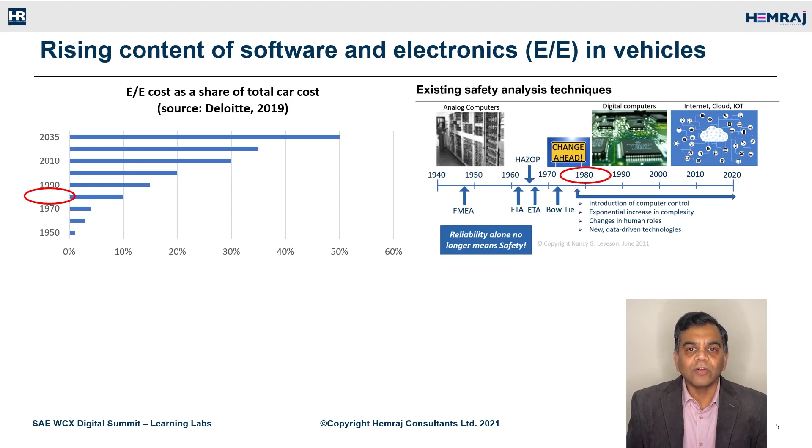Software and electronic malfunction is creating havoc. It results in loss of reputation of companies, penalties and fines, and billions of dollars lost in warranty claims, depleting profits. Let's look at the statistics in 2019. Over 1.3 million people are dying in road accidents. 15 million vehicles were recalled, and more than 3 vehicles were recalled for every new one manufactured. We have to identify ways of minimizing hazards before the first vehicle drive.

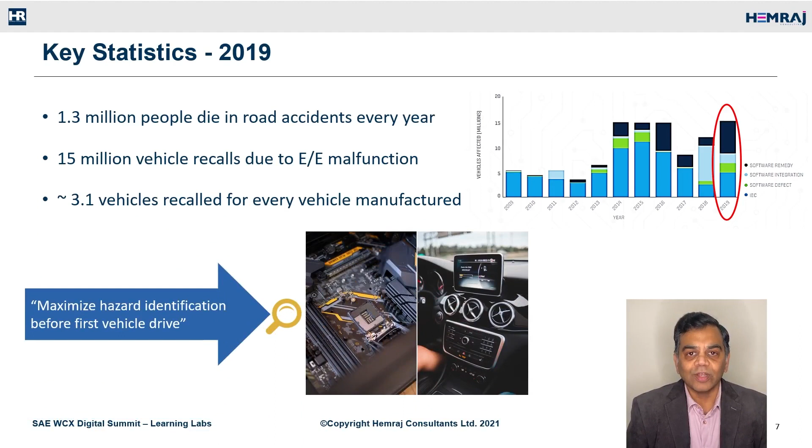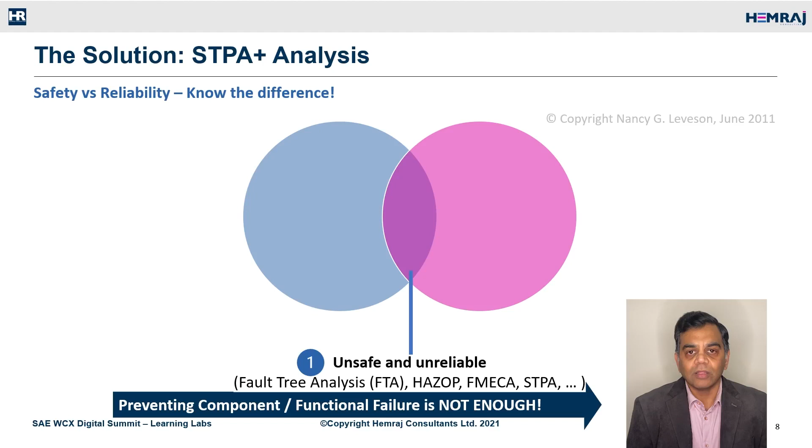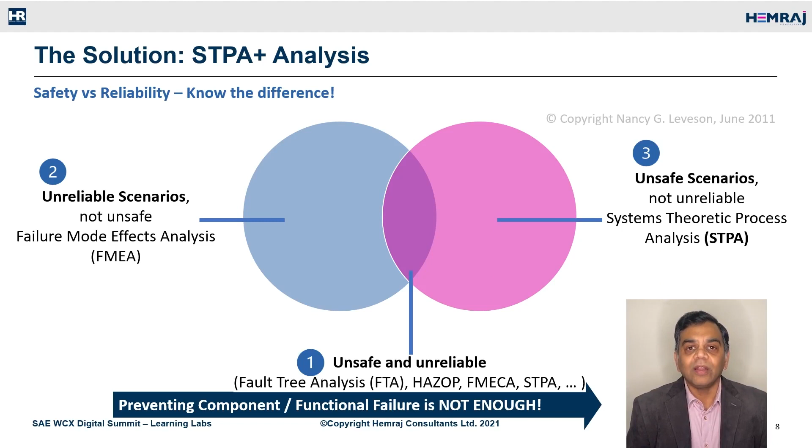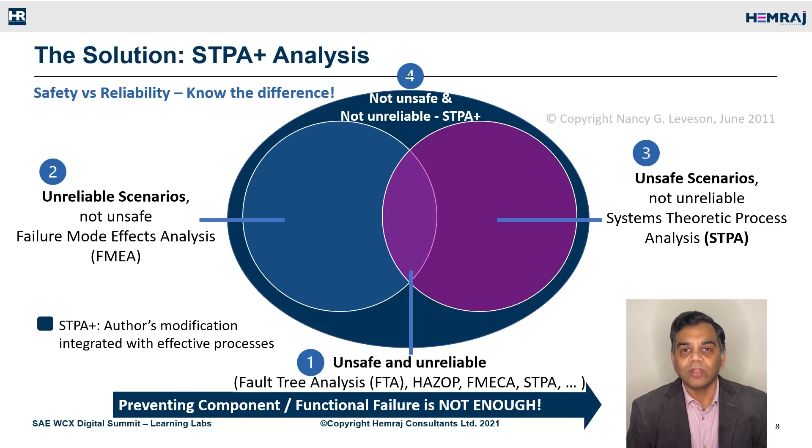First and foremost, it helps you in maximizing the number of hazards identified upfront. It also provides early feedback to other work products from a fresh eyes perspective. It also refines the input work products used in performing this analysis. Last but not least, it concurrently supports the analysis of safety of the intended functionality as well as cybersecurity along with safety. And don't forget, you could perform this analysis in days or weeks, which potentially could have taken weeks or months by other existing techniques.

So this is STPA as defined by Nancy Leveson and Professor John Thomas of MIT. The 4 steps comprise identifying the system boundary and defining the purpose of analysis. Second step is defining the control structure, which comprises a controller and a controlled element. In step 3, you identify the unintended control actions, and in step 4, you identify the scenarios when unintended control actions could occur.

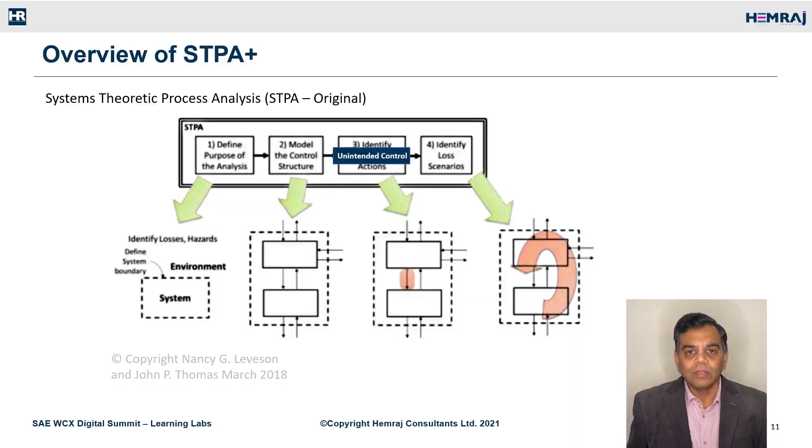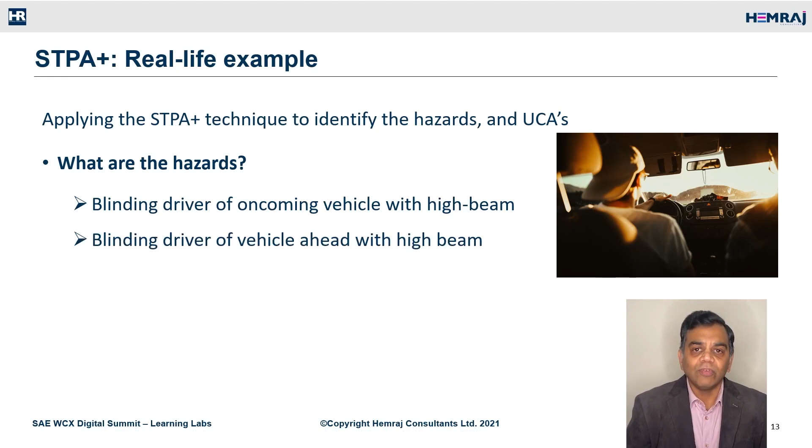If the headlamp's high beam is not switched on, the driver of the ego vehicle will not have good visibility of the road ahead. In step 2, we define a control structure, starting with the driver, the vehicle, and the road and environment in which the vehicle is driving. We then build in the building blocks of the system aligned with the system architecture.

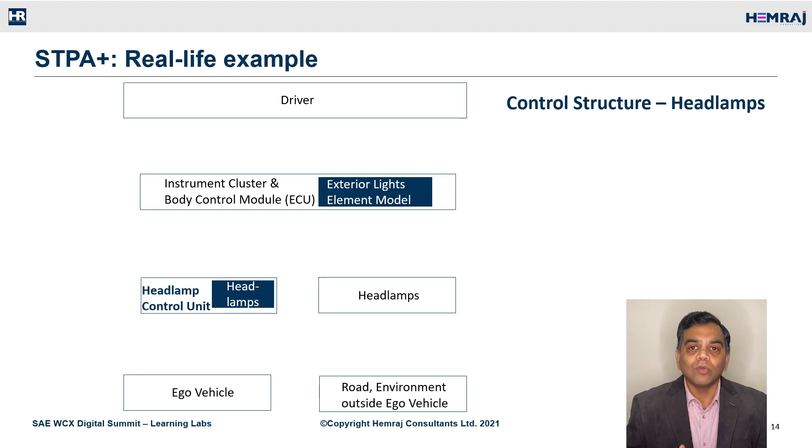Notice the abstraction of the instrument cluster and body control module, which have 2 different control units, into a single electronic control unit. The right level of abstraction is important to optimize the identification of control structures. We then start with the arrows going from top to bottom, which are in blue, which are the control actions. So the driver can control the vehicle by applying the brake or steering the vehicle or accelerating it.

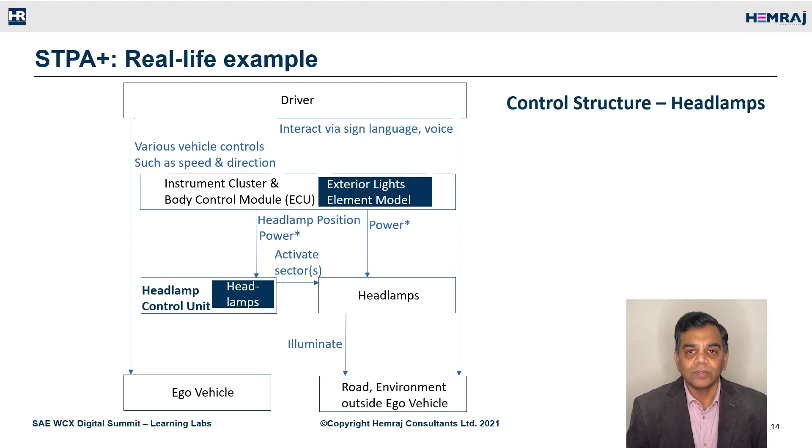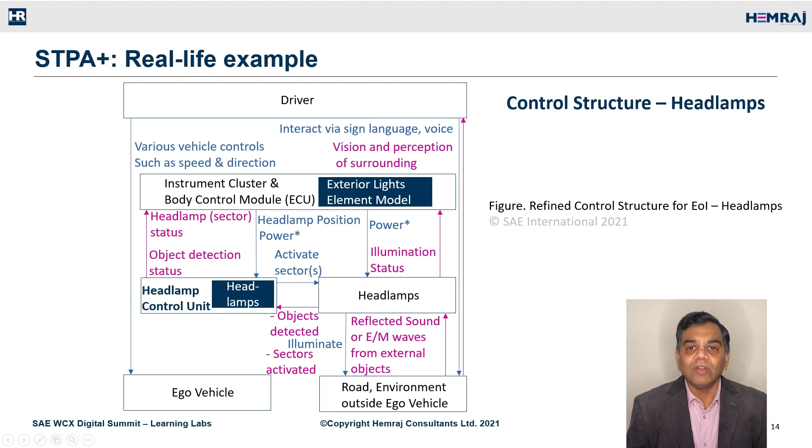Similarly, the power supply is provided by the instrument cluster to the headlamp control unit and the headlamps via the ignition switch. The pink arrows show the feedback provided by the lower level control elements to the controllers. So the headlamp unit is communicating the objects detected to the headlamp control unit and also informing the instrument cluster. These translate to the responsibilities of the controllers, and the feedback is used by the controller to align with the element model that characterizes the behavior of the controlled elements.

In step 4 of the analysis, we identify the loss scenarios. These again align with the hazards and the unintended control actions identified earlier. For example, the oncoming vehicle may not be detected. Further, there could be a delay in the communication between ECU and HCU, which would result in the headlamp control unit switching on the high beam for a longer time than required.

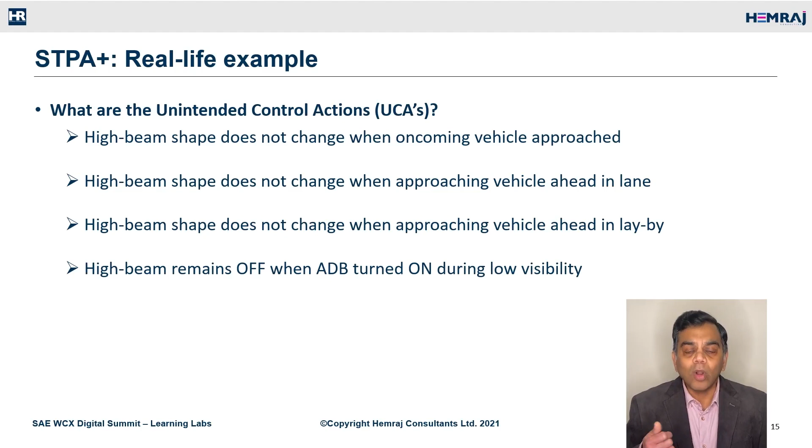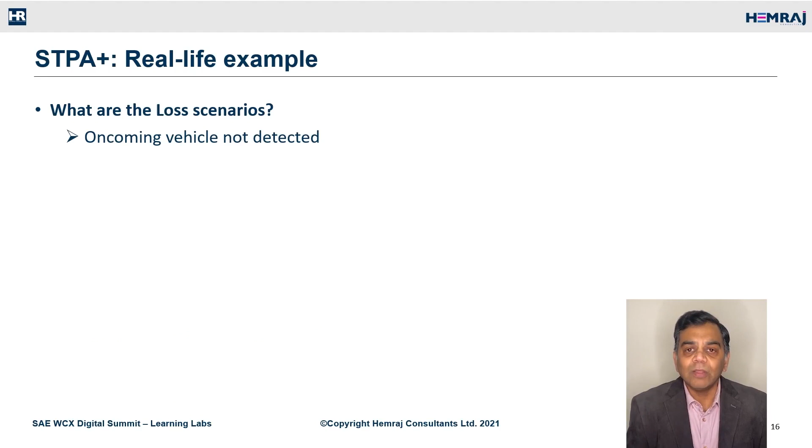And lastly, it is quite easy to understand that if the headlamp high beam is faulty, it will not switch on. But what this analysis technique helps you to understand is that it is quite possible that the headlamp control unit assumes that the high beam is already switched on along with the low beam, but because of the configuration of the different sectors and the commands, none of the sectors actually get switched on.

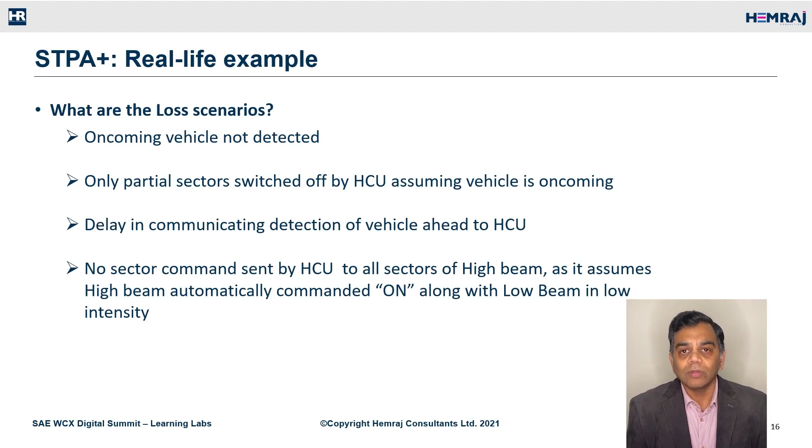Now let us take a bit deeper look into preventive quality assurance. Let us talk about the new concept of FMEA analysis, especially for ECU hardware. Why a new way? What was the background? FMEA itself is in the meantime 70 years old. At the beginning, it was created to analyze mechanical systems, following the philosophy that reliable components make a reliable system. This mechanical point of view was transferred into the electronic world of hardware and software. And it is not really matching with expectations, I'm afraid.

As you can imagine, the Sigma FMEA is a combination of classic FMEA and Six Sigma methodology. It supports analysis of all ECU life phases totally. It starts with the dream of a system, requirements analysis, and ends with recycling. The first aspect of analysis is design for functionality, meaning voice of customer. Electronics have to fulfill the expected functionality first. After that, the design for manufacturing aspects, voice of business, are to be validated.

Sigma FMEA analysis process will be done under two aspects. Aspect 1 is the ECU design for functionality analysis, with the goal to find out if the electronics are able to fulfill customers' requirements. Interfaces between modules, their functionality and other characteristics are to be validated. This is to be done independently of maturity level.

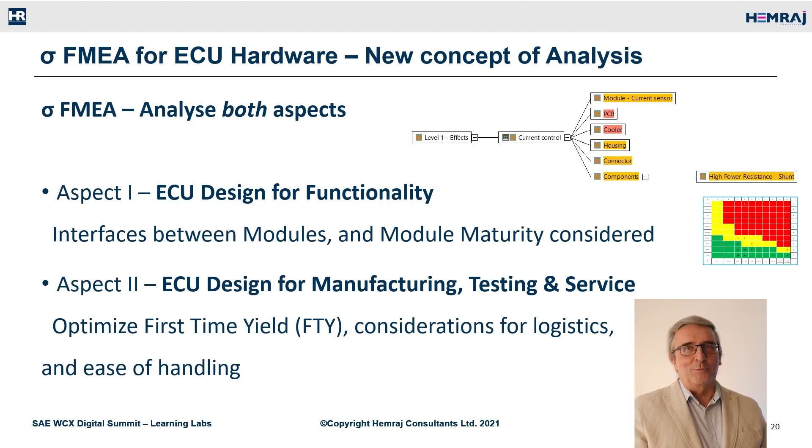Sigma FMEA is a result of many years of experience as an FMEA moderator for the automotive industry. My customers, mostly German automotive OEMs and their suppliers, started to use it in 2017. The results were a reduction of development time of up to 20% and reaching FTY values of 99% and better after a very short period. Our next subject is FIT calculation.

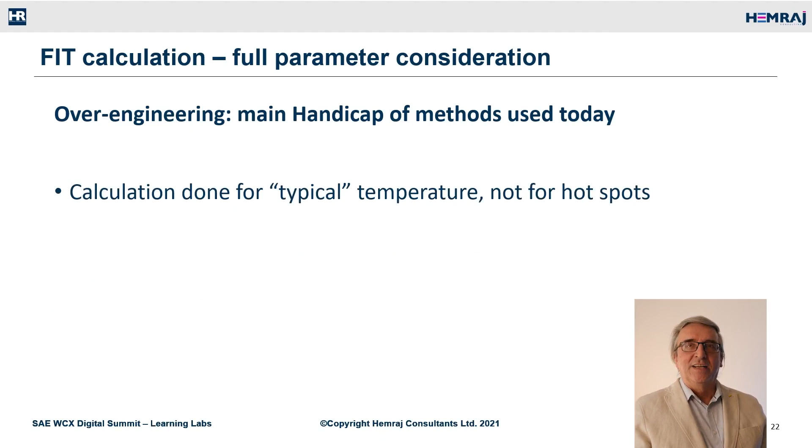A very important point for all of today's hardware developers. With one handicap, I'm afraid. The consequence of this handicap is over-engineering of the electronics. Why? Because the calculation is done mostly for one hypothetical temperature, mostly higher than the real one. The status of the electronics is not really considered, and the lambda values used come from standard documents. Current values from component manufacturers are not considered.

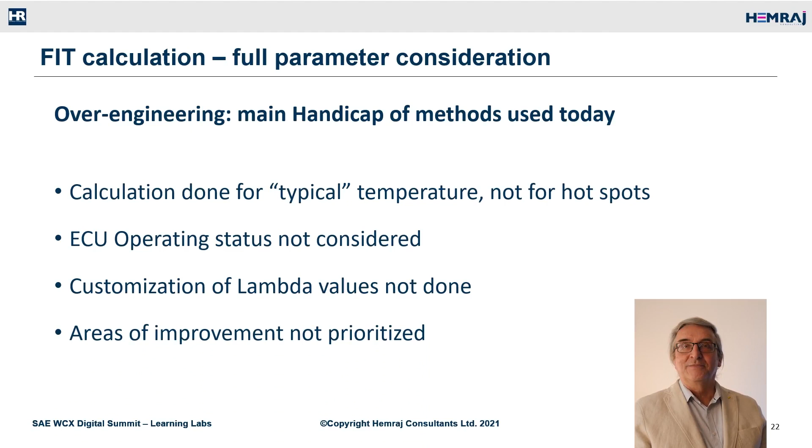Another point is, if we already have a bad FIT value, nobody knows what to do against it. Let us show what is to be done. To fulfill customers' expectations, a special tool, Sigma FIT, was prepared. It is validating the FIT value according to the real temperature profile defined by the customers themselves.

Storage time and different statuses of the electronics are also considered. To make it as quick as possible, a direct interface to the bill of material is supported. On demand, a direct integration of results in the ISO 26262 calculation could be supported. As you see, it is very easy to change the source of lambda values. The default one is the well-known SN 29500.

To make understanding of results easier, we are supporting FIT and also additional standardized or own parameters, making reliability of the electronics better to understand. Well known is the B10. Additionally, we are also calculating other parameters on demand.

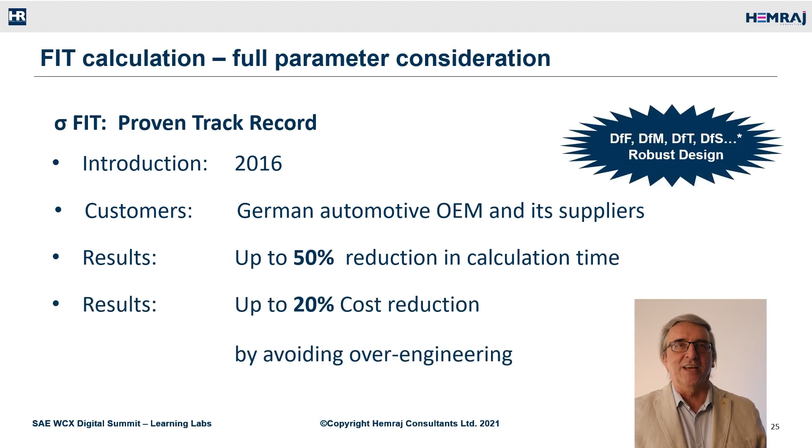Most of you have already got an FMEA coming from our department or from the suppliers. And the main question was, is it good enough? Nobody knows it. It's a big handicap of today's way of validation that we do not really know what it means. Our results are based on individual know-how, strongly influenced by psychological aspects. And on top of everything, the meaning of good enough is not really defined. In case of validation, if we believe that it is not good, there are no takeaways available to improve it. Nobody knows what is to be done. Why is it really not good enough?

To solve this problem, we've prepared special tools, easy to use, easy to validate, and giving you an answer concerning conformity with the VDA standard and the status of implementation of critical technical aspects. The most important is the easy traceability of the results and using them for future projects. The validation tool is based on a smart checklist, including all relevant VDA aspects and additionally technical aspects of the product. As you see, conformity of each point is to be validated. The state of fulfillment can be validated from full, green, up to red, not fulfilled.